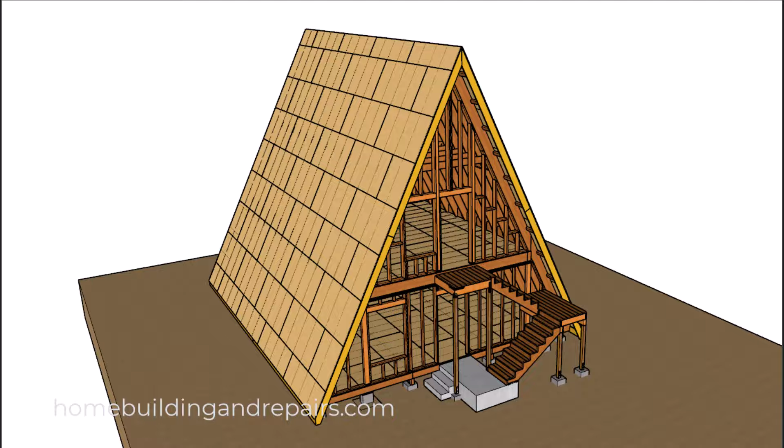Here is another A-frame video, and in this one here I took one of the previous models, the larger A-frame that's a 2-story, and removed the stairway located on the inside so that I could create a solid floor on the upper level. And then I removed a couple of footings, and we still have a couple of posts, one on each side, in the lower level.

And you could always do some modifications to the floor framing to get rid of those, and maybe I'll make another video on that in the future. Next up, let's take a look at the footings, kind of spread out here.

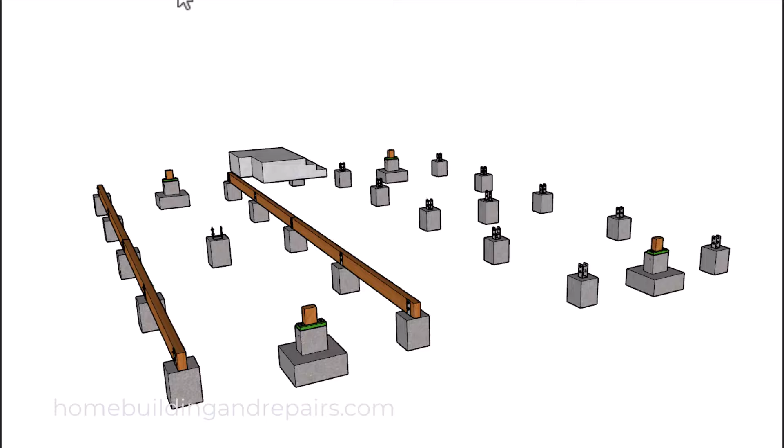And don't forget, you can pause the video, slow it down, or even speed it up. I have a few followers that like to watch my stuff at 2 times the speed, and I really don't care what you do as long as you're getting the information you need.

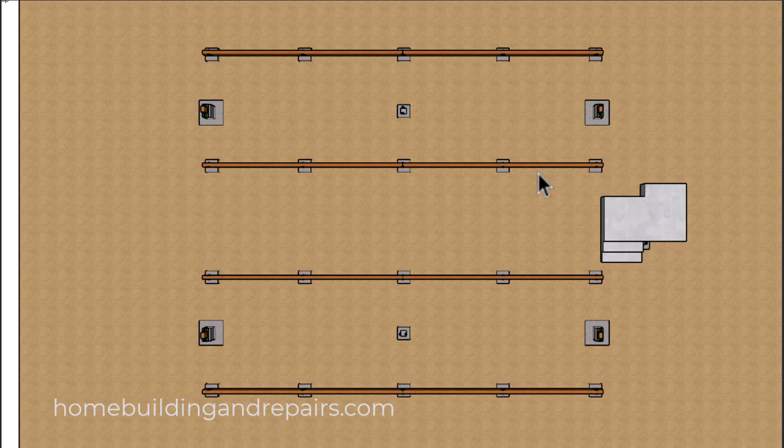And I will be adding a front porch. I don't even know if this is big enough to be a porch. And the footings that are going to be used for the second floor support, plus the roof framing support. And then these 4 sections right here of footings are going to be for the floor framing.

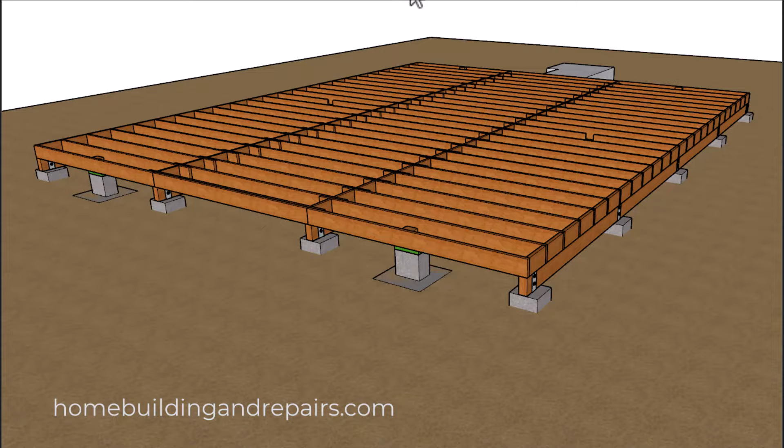Next up, let's go ahead and add the floor joist. The floor joists are going to lap along the 2 beams located on the interior. And these joists here will be attaching to the post that we're going to put in. You can always modify the layout and have the joist run next to the post. Remember, these are just examples of things you can do and not always something that's going to be approved by your local building department.

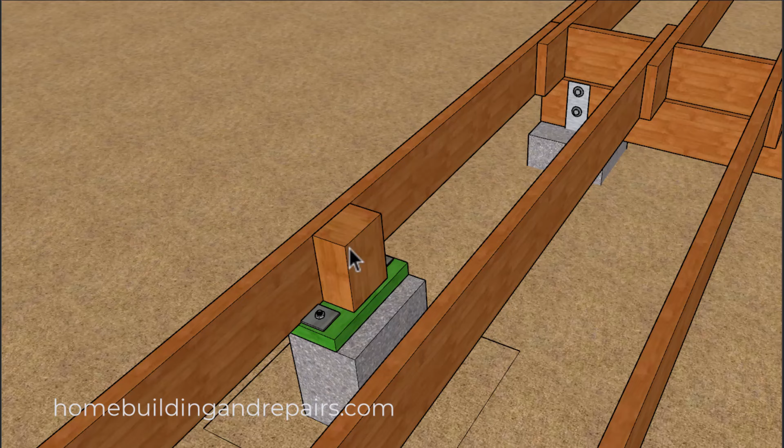And if you noticed, I installed a joist here. That's because if I didn't, I would be overspanned, or my on-center layout would be larger than 16 inches on center. And then a close-up view of our framing supports for the post above that will help to transfer the load from the floor beam above down to the ground.

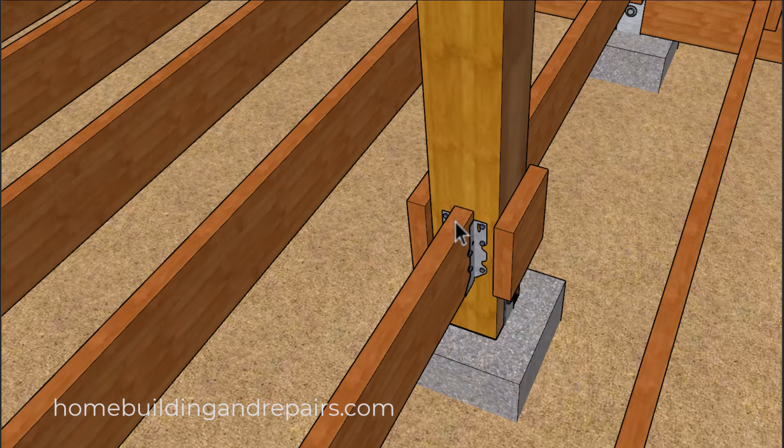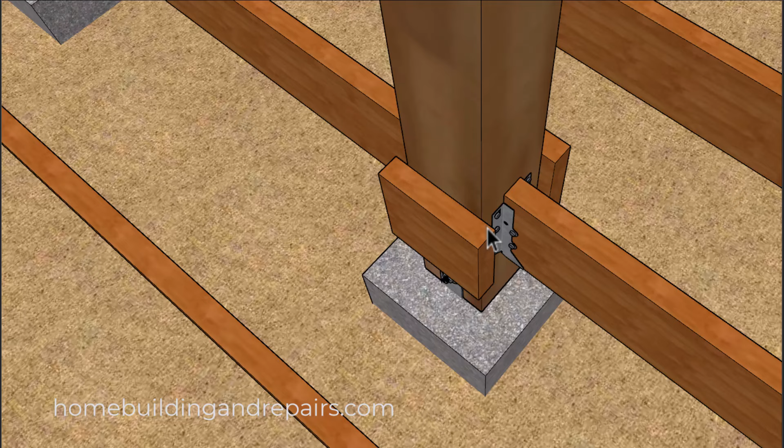And the reason why I did this was to keep the floor sheathing waste to a minimum. And I don't think your building inspector would have a problem with this right here. I've done it before. And I went ahead and went a little bit longer here with these blocks, maybe 1 inch or 1.5 inches on each side to provide extra support for the floor sheathing.

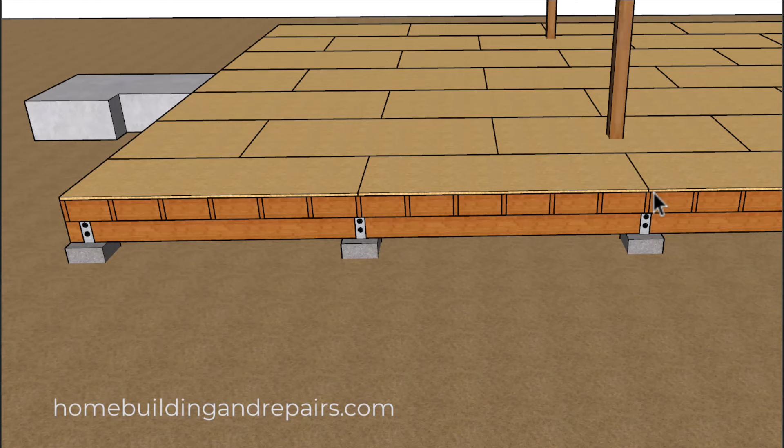Next up, let's go ahead and install our floor sheathing. And I'm going to pan out over here to give you an idea of where the breaks for the floor sheathing are going to be located to provide us with the minimum amount of waste. We needed to locate this joist right here. And something else you might want to do will be to attach a joist to each side of the post here, and then maybe run some blocks in between those joists to support the floor sheathing in that area.

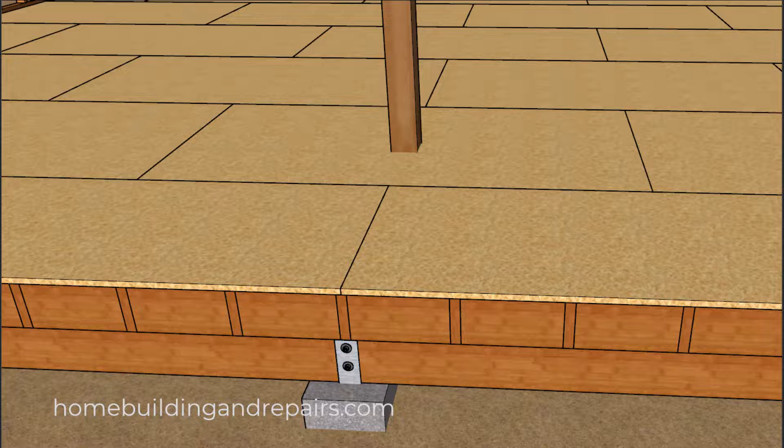Next up, let's go ahead and take a look at the walls and our posts. So we got a post here, post here, post here, and then the same on the other side to support our floor beam. Next up, let's go ahead and install the floor framing, our beams along with the floor joist.

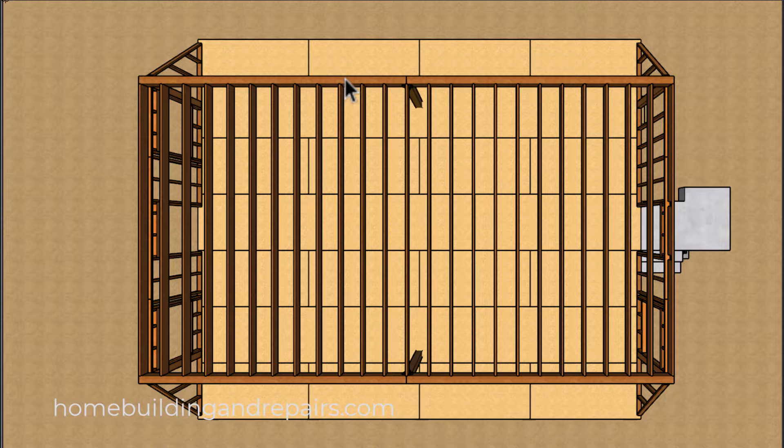And in this example here, I believe I have a 32-foot long building, 2 16-foot long beams. And you can see where it would be difficult for me to move the post to either side without creating some waste for the beam. So for example, if I move the post over, I'm going to need a longer beam over here. So instead of buying a 16-footer, I'm going to now need an 18-footer and then end up with about 18 inches of waste. And I'm not about to suggest that's the end of the world.

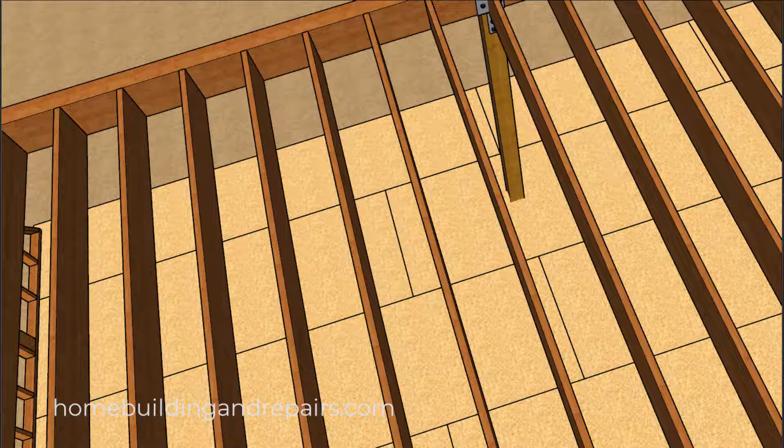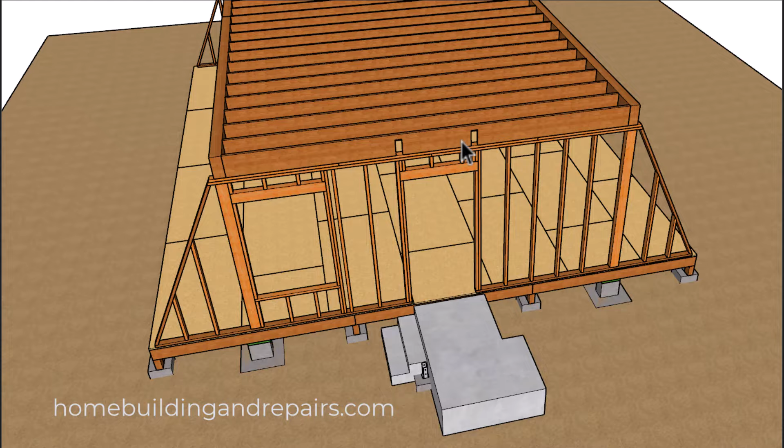If that's going to work for your project, then keep that in mind. I know sometimes we try to save a few dollars in the materials, but it ends up costing us more money in labor. And that could be exactly what you're dealing with here. Now you could go ahead and install the floor sheathing and then the roof rafters if you want to. However, I like to have my stairs installed before I do the floor sheathing, and if possible, before I do the floor joist. So let's go ahead and start working on our stairs.

And we are going to install 4 posts here and keep the stairs about 2.5 inches away from the building, or 2.5 inches away from the face of the wall framing studs.

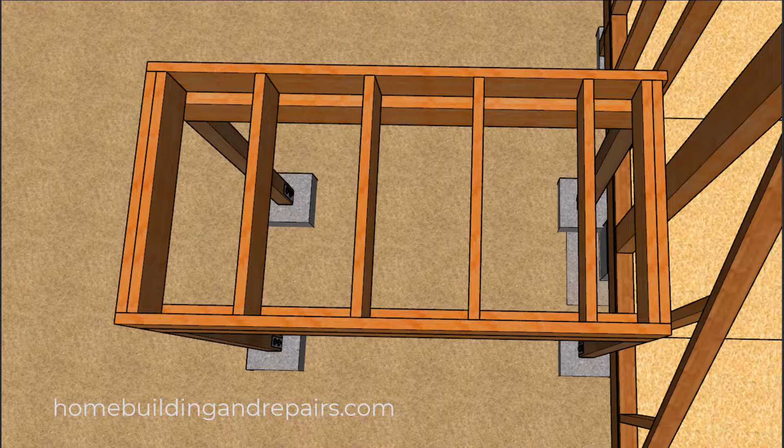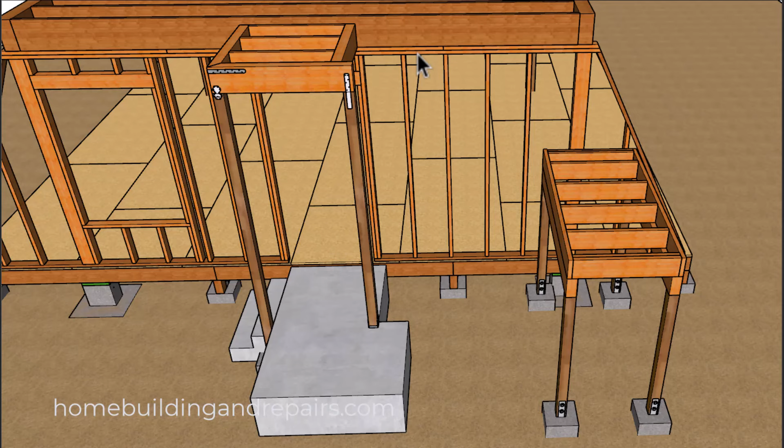So we're going to have a set of stairs here with a landing that's going to go up to another landing. Let's go ahead and put our stringers in. And we're going to have 1 extra step on the bottom, 1 less step on the top. And I could have always put another step in the landing and then used the same amount of steps for the upper and lower sections of the stairway.

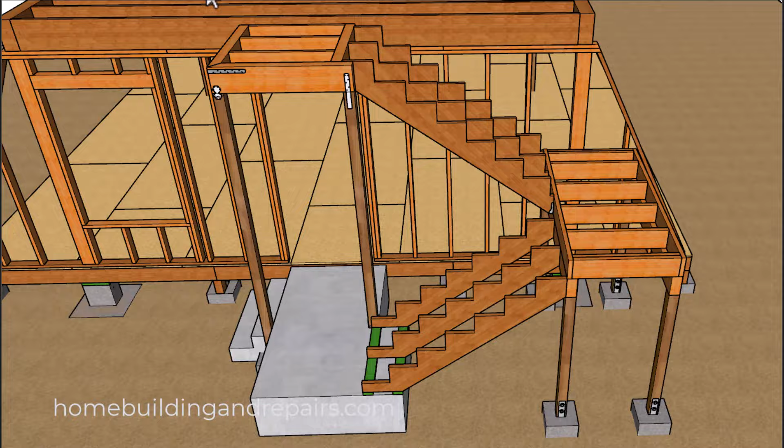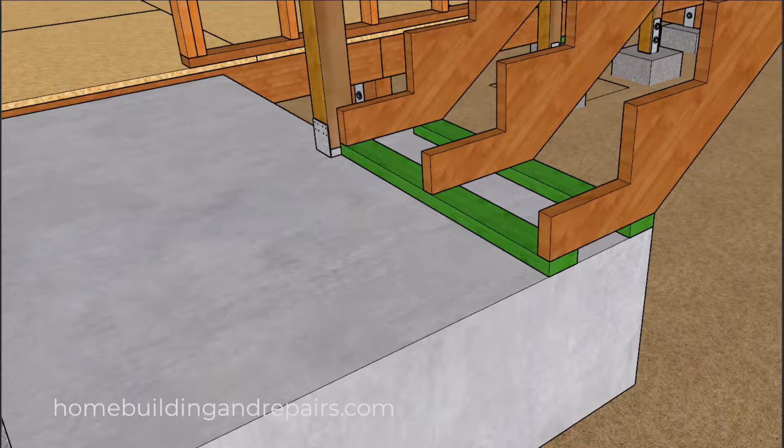But this is what I came up with here. Go ahead and take a look at the bottom, and of course the framing plates will attach to the concrete with anchor bolts that will be poured into the foundation. We're going to have a post over here, and then a couple of steps going up to the landing. We do have a 2-inch difference between this floor and the finished floor, and this might be a little bit higher once we add flooring.

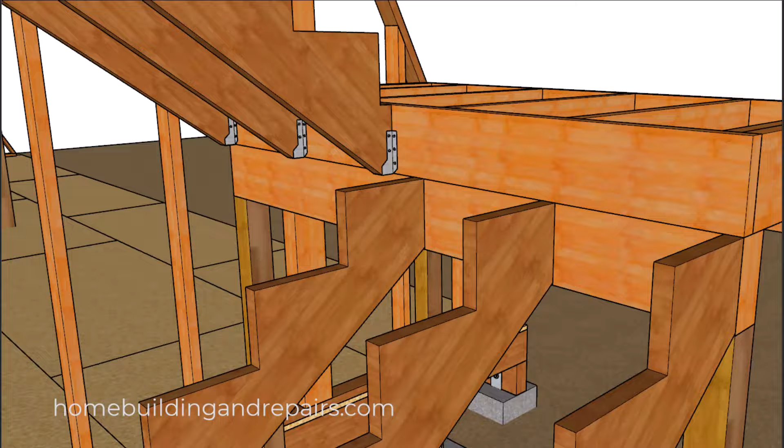And then it worked out where I could install some hangers here. Sometimes it doesn't always work out that way. And I did have to extend the upper joist so that I would have something to nail the hanger flange to. However, you could always use an inverted hanger if you wanted to. Go ahead and install our decking and our risers.

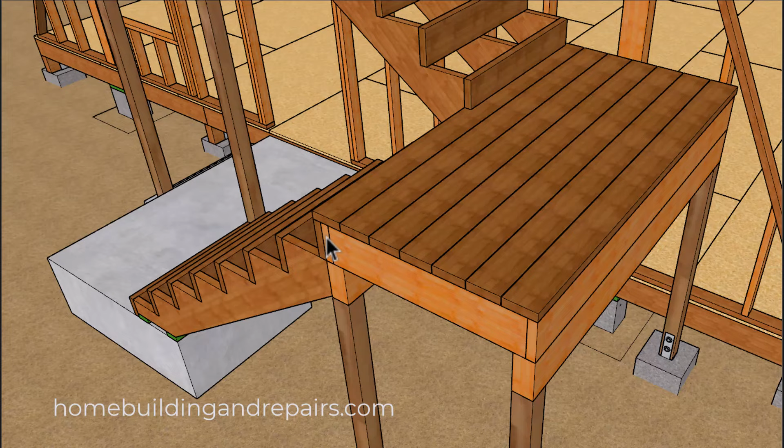And let's go ahead and take a look at the upper landing. Again, we have a 2-inch difference. However, your local building codes might require these distances to be a little shorter or a little taller. Next up, let's go ahead and add our treads.

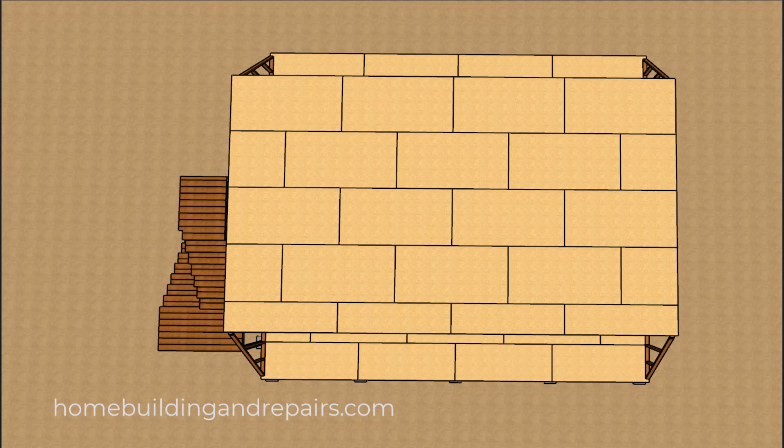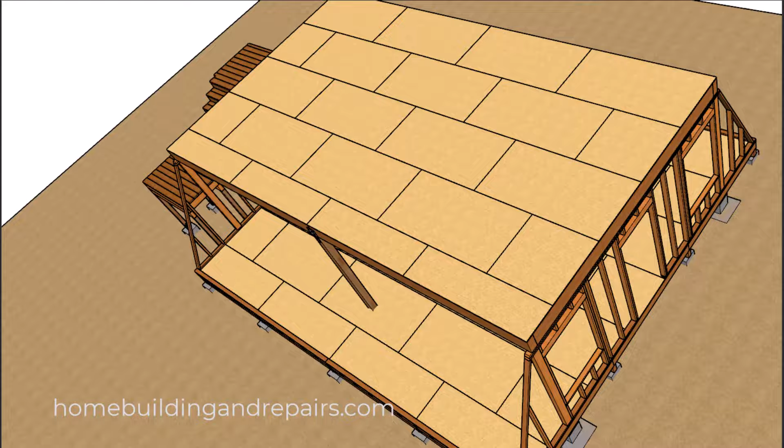Now that we have our stairs to walk up, let's go ahead and install the floor sheathing. And the joists are laid out to minimize the waste of the floor sheathing. And this is very important. Sometimes by just moving a joist a few inches, you can save hundreds of dollars on your floor sheathing by not producing the additional waste that you don't want anyway. So take your time when laying out all of the floor framing and roof framing members.

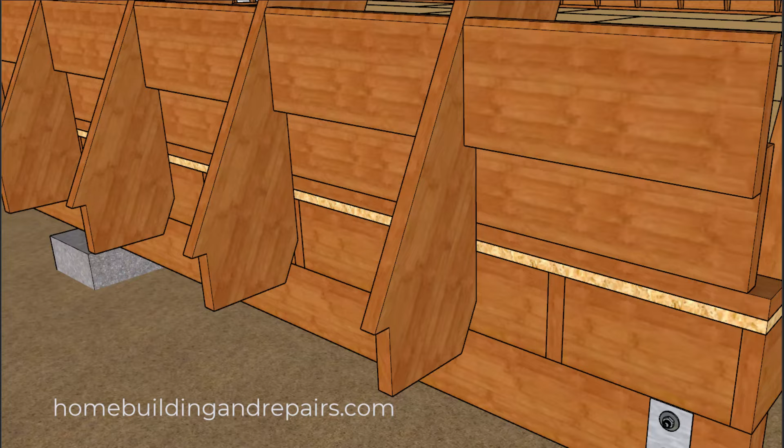Next up, let's go ahead and install our lower roof rafters. And these rafters will sit on a framing plate and will need to be blocked. And I do have more information on this in our other video. And here's the title of that video: Lakeside A-frame style second story house with steep roof, floors, walls, and stairway, part 5.

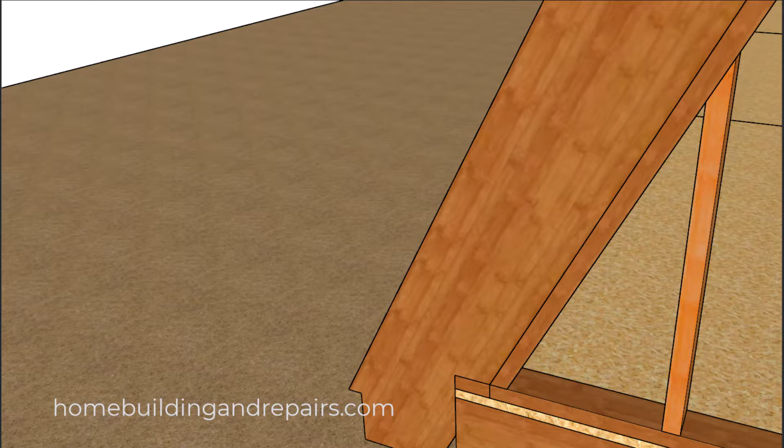Next up, let's go ahead and put everything else together except for the roof sheathing, which will include the fascia board, the lookouts, and the front and the back wall. And we are going to need to change some of the layout in the upper wall and the lower wall in the front, because in the previous example I had a window down here just like this one, and then I had 2 windows located near the center.

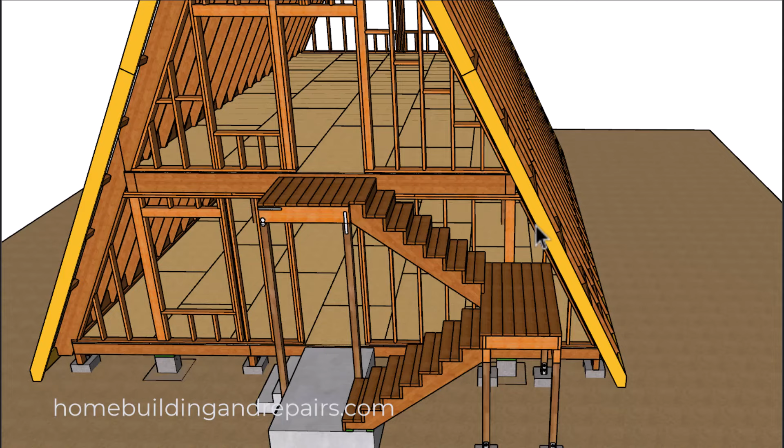And you might consider installing skylights in both the upper and lower sections to get a little more light in also. And you might be required by your local building department to do that anyway. Or you might be required to install larger windows. So lighting will be another thing to consider, along with the problem we're going to have with headroom in this area here, because anyone coming up or down the stairs is probably going to hit their head eventually on the fascia board here. So we're going to need to make some modifications to that.

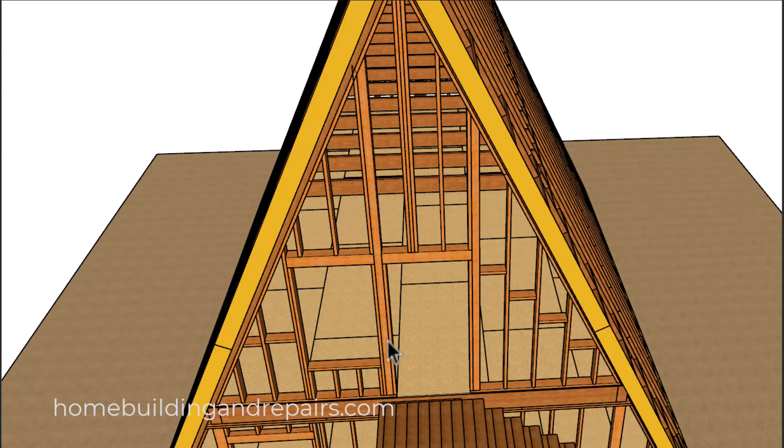Now, another thing I did here was install a post on each side of the doorway to provide us with some additional structural support, because the longer wall framing studs will allow the walls to move or flex, and the post on each side of the doorway just might eliminate that from happening. So another thing to consider when dealing with extremely tall walls, along with a view of the fascia board extending into the stairway. Now let's go ahead and solve that problem by moving the fascia board over.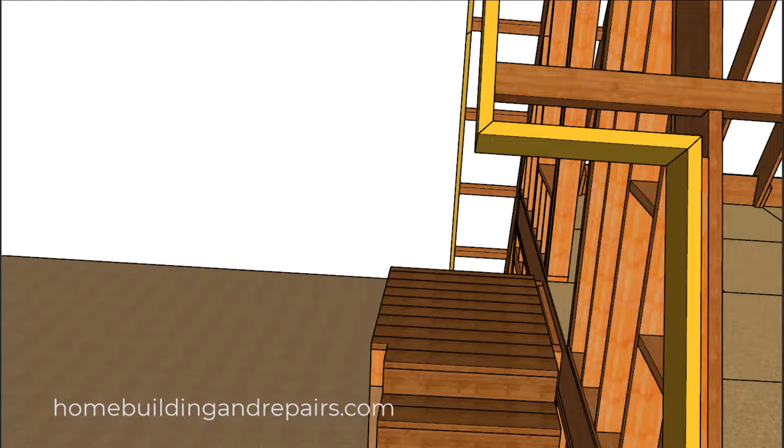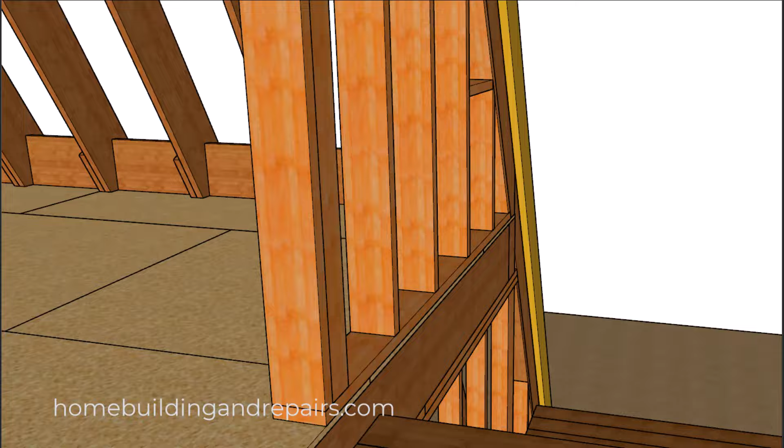So let's go ahead and zoom in on that. And you can always angle the fascia board if you don't like this sharp 90-degree bend there. And don't forget to install some type of a spacer board, either a 1x4 or a 2x4, something that's going to allow you to have a space or a gap in between the face of the wall framing and the backside of the fascia, so that you could install siding behind the fascia board.

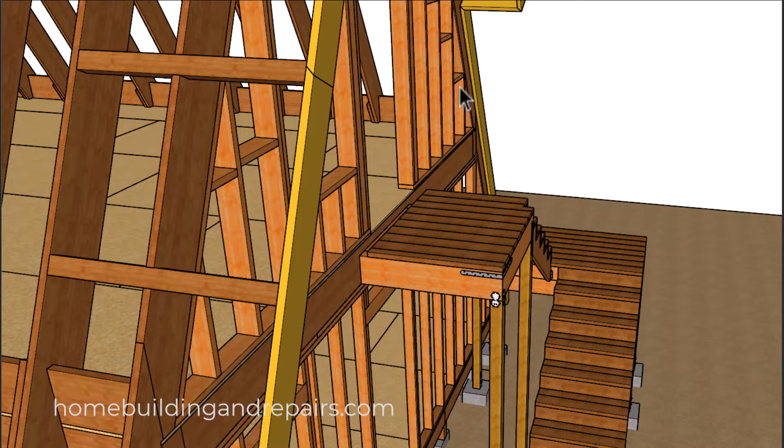And I'm pretty sure I've mentioned that in almost every one of my video series, not in every one of the videos, but definitely in the series. So you can see here where the problem is solved. So let's go ahead and wrap this video up.